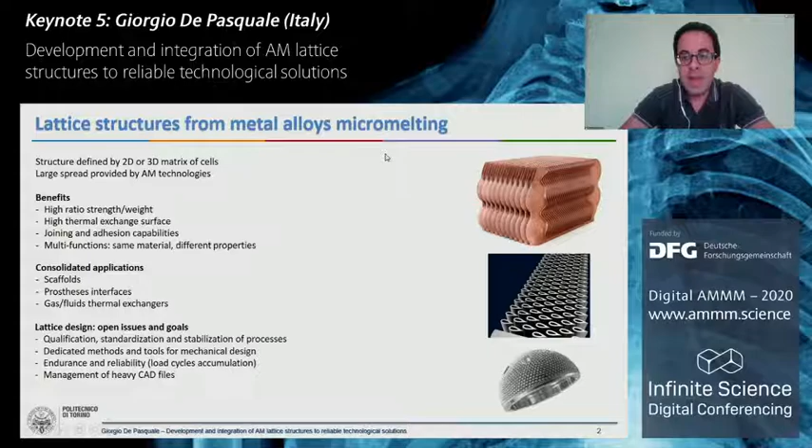Another important issue is related to the lifetime of, let's say, lattice structures applied to mechanical fields, where you have variable loads in time because of the accumulation of load cycles. And last but not least, the problem is the management of CAD files, which is sometimes complicated by the dimension of these files.

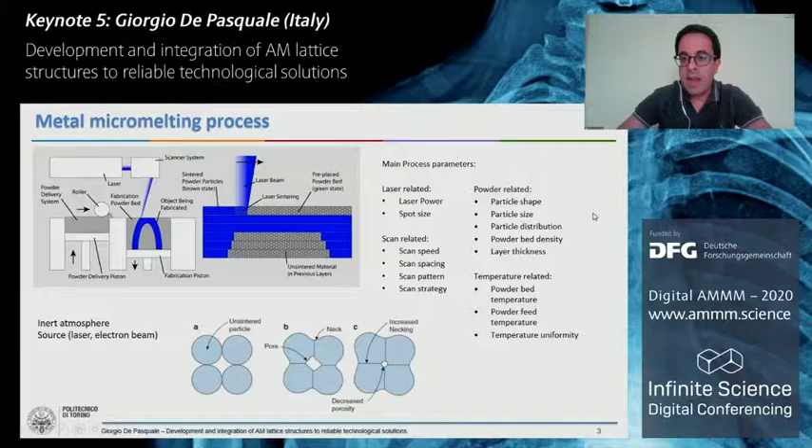So just to have a fast idea of the many process parameters affecting the mechanical design of lattice structures, here I listed the most important of these parameters. Some of them are related to the laser, some of them related to the scanning performances of the laser over the powder bed. Other parameters relate to the powder properties or temperature management. So we have a huge number of influencing parameters that change the mechanical properties of the component. We have to find some way to manage this wide range of variability to find a repeatability of design and fabrication.

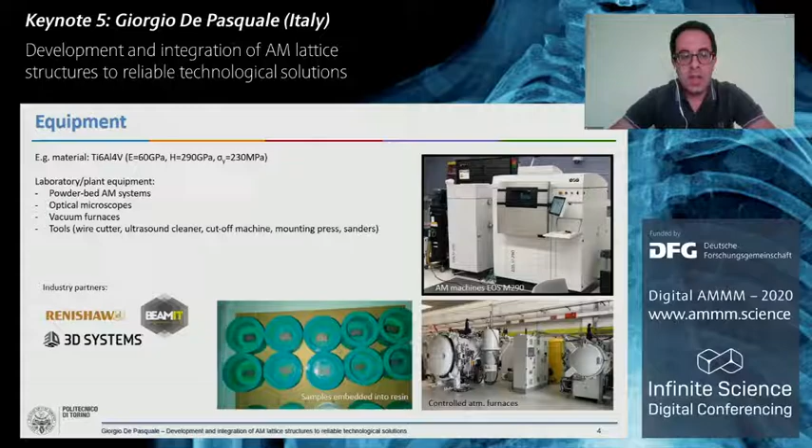We are using several industrial and academic equipment to provide the best reliability and repeatability output of our processes in order to get confidence from our results. So not to have large variability of results depending on the supplier of lattice structure. That is one of the main issues up to now. So we are using SLM processes, EBM processes, laboratory facilities like microscopes, other tools for the mechanical characterization, optical characterization of our samples.

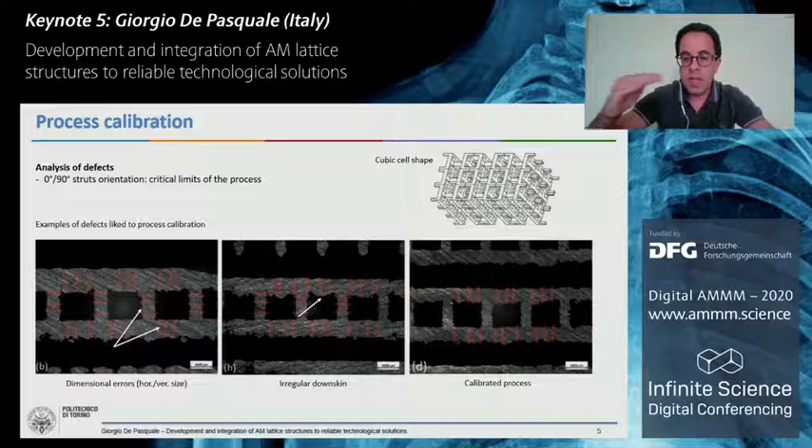So the first point is to stabilize and to calibrate, let's say, the fabrication process. To do this, the best way is to find what is the correlation between one process parameter and one mechanical property, and also the mutual correlation and interaction between the process parameters. For instance, we can understand some problems looking at these pictures where we have dimensional errors between horizontal and vertical struts, or irregular shape of downskin or upskin of our structures.

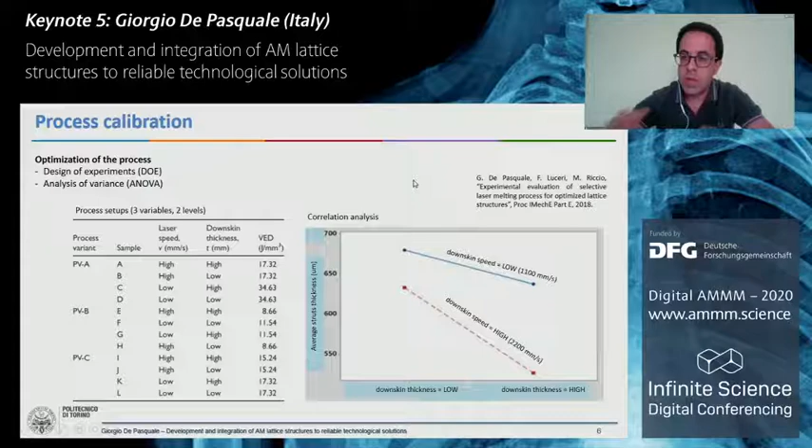The same thing is valid also for the density and the porosity of the material, which is also related to the parameters of the process. We know that high porosity means low mechanical properties. High porosity on the surface associated to the contour settings of our process means low fatigue strength.

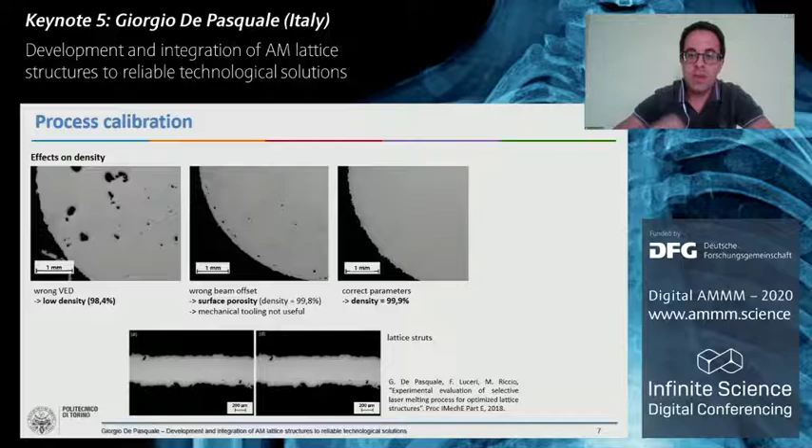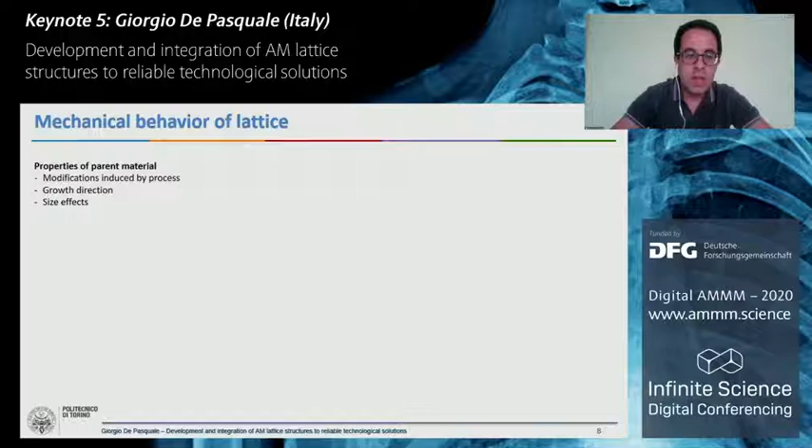And again, from a mechanical point of view of structural design, we need to understand which parameter affects which specific topological property of our structure. Moving towards the mechanical behavior of lattice, we have 3 different levels of analysis. The properties of the parent material, of course, depend on the process, on the growth direction inside the additive manufacturing machine, and also on the size effect, so on the dimension of the sample.

In another scale, the micro scale, we can investigate the properties of lattice, so the properties of the single cell, by using especially theoretical analysis or compact modeling. And in the last scale, the macro scale, we can understand the behavior of the full structure and the interactions between cells. Here, we can also apply experiments to validate the previous models.

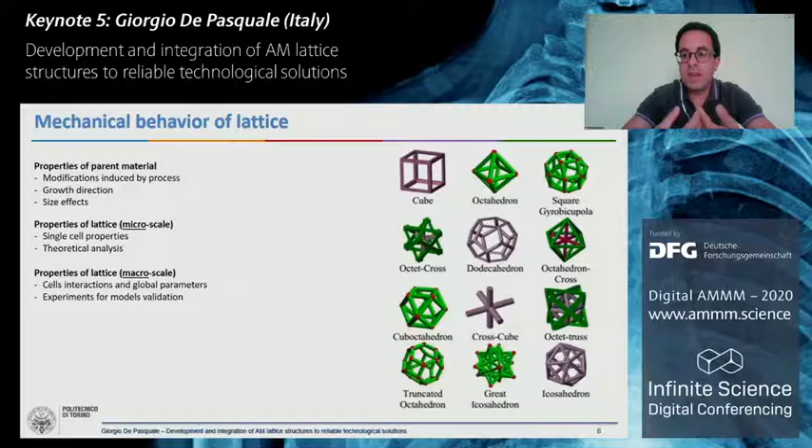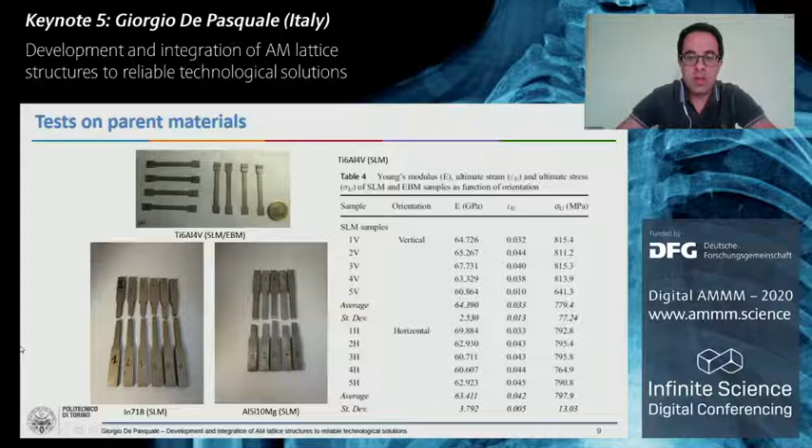So the parent materials can be studied by means of mechanical tests on specific samples, designed depending on the orientation in the fabrication machine, on the process parameters, and of course on the material used. For example, we have output curves like this. Just to have an idea about the importance of the process, the same material can express completely different behavior, ductile or brittle, depending on the process.

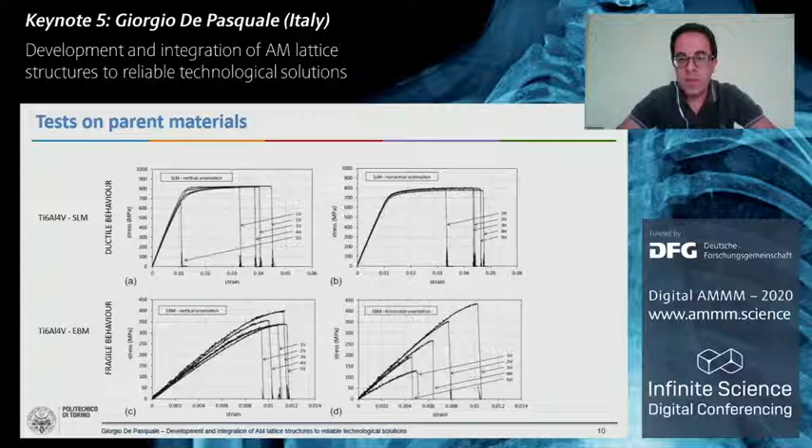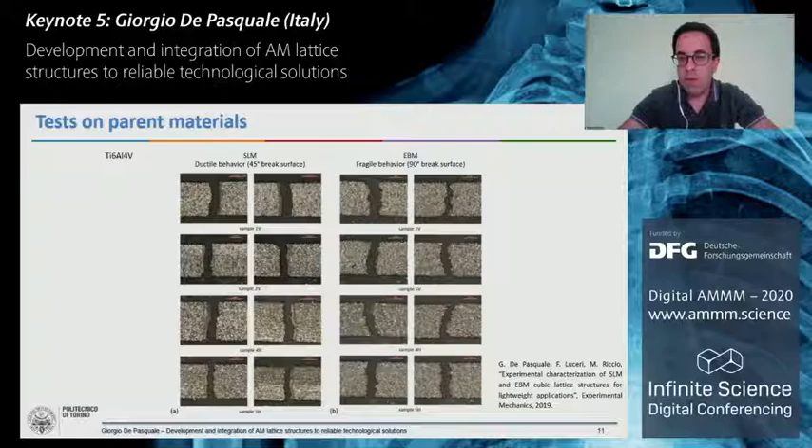In this case, we have titanium alloy run with the SLM process on the top line and with the EBM process on the lower line. We can see very different behavior, just to underline that the process is determinant in this case. The same thing is reported by the breaking surface of samples. We have a 45-degree breaking surface orientation, typical of ductile materials, in the first case on the left, and the 90-degree orientation, typical of fragile materials, on the right.

About the structure, after combining different cells and fabricating a structure, we can investigate these properties by means of parametric samples. That means these samples have different cell size or shape, and we can control the influence of each geometrical parameter on the results and compare these results with the predictions provided by models.

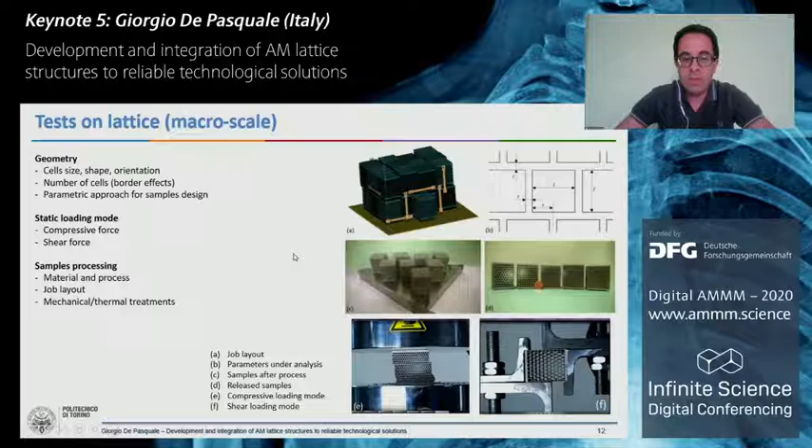On the top left, we have an example of the layout of our machine chamber filled with different kinds of samples with different orientations. Then the printed samples, the released samples, and on the lower line, two frames of compressive and shear tests on lattice structure samples. Of course, here we also have other influences on the results, for instance from post-printing treatments, thermal treatments on the samples.

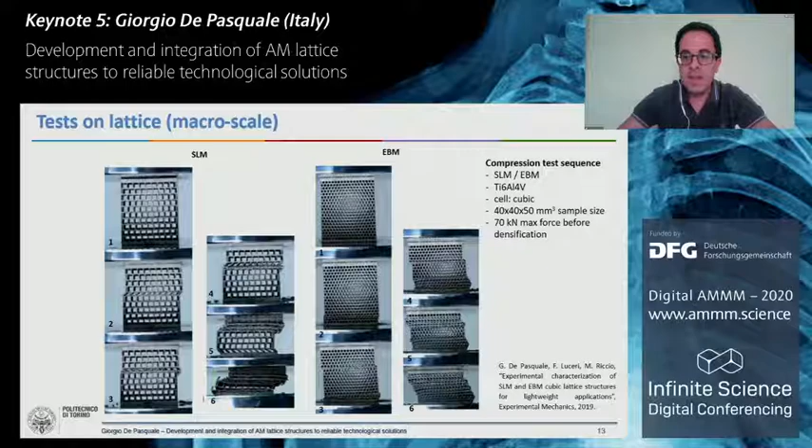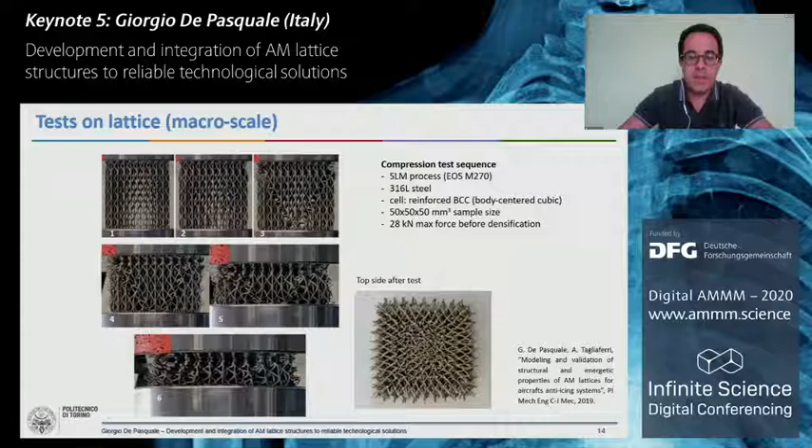Here we have different cell shapes, but also different strut thicknesses. Just to give an idea of our approach, which is to investigate and cover different cases of dimensions and shapes of the lattice to provide validation of predictive calculations.

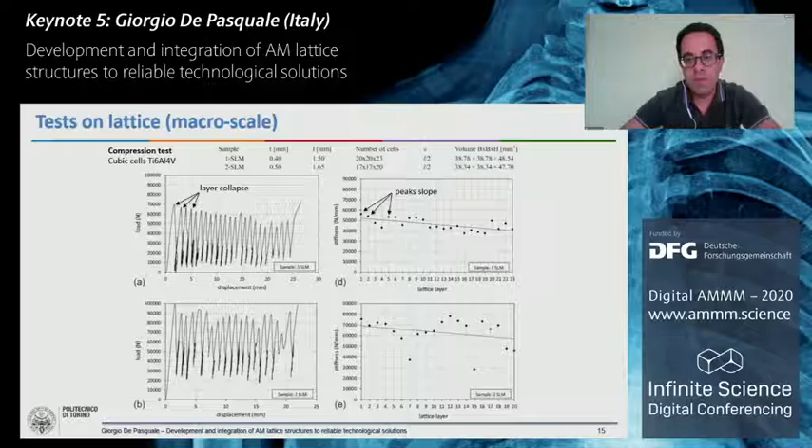In the case of macro scale test results, we have diagrams like this. Each peak corresponds to the collapse of a single layer of our sample, and every peak also reports the stiffness, mainly, of each of the residual layers surviving in the sample. So in a load-displacement diagram, we have a behavior like this. In a diagram where we plot the stiffness of the single layer versus the number of collapsed layers, we also observed a trend like this, testifying a progressive lowering of stiffness during the collapse of each single layer of a lattice structure.

Another important result from our tests is the mode of failure. In this specific sample, we observed three main failure modes. Mode 1 is associated with buckling, so instability of vertical struts. In mode 2, we have bending of horizontal struts, so plastic failure. And mode 3 is a combination of mode 1 and mode 2.

Here we can also see that the fracture line of our sample follows the shape of the cell. So in some way we are also able to modulate the direction and the way of crack of our sample by changing the shape and the distribution of cells in space.

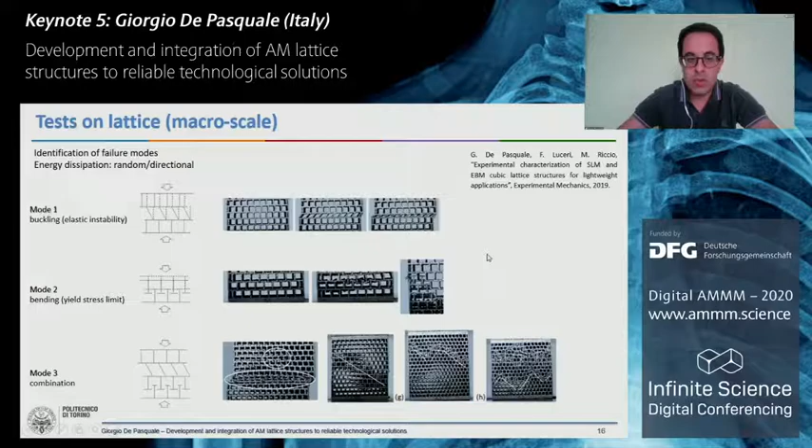Something about the modeling of lattice mechanical behavior. There are different approaches. The analytic model is the best one in theory, because it allows us to clarify the specific relations between the parameters.

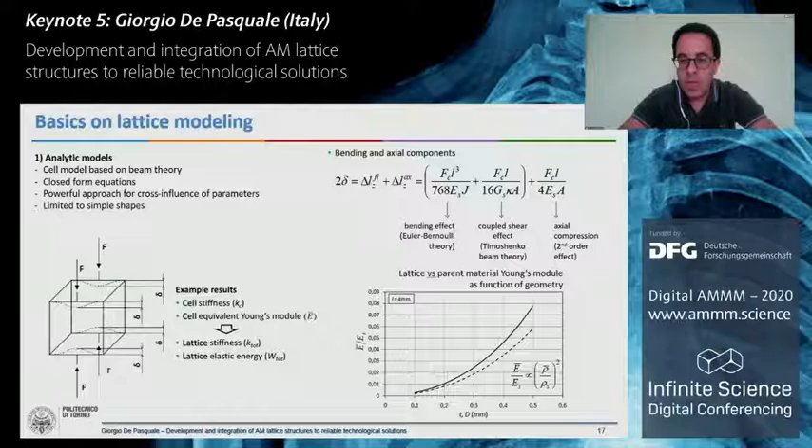Because in analytic models, you can write the full explicit equation that describes the behavior of your cell. And analytic models are based on the beam theory that structural engineers well know. But unfortunately, only simple shapes can be treated with analytic models. In case of complicated shapes of cells, it is quite complicated to describe equations like this, for example, that is valid for the cubic cell, where we have different components from Euler-Bernoulli theory, Timoshenko beam theory, and so on.

So for other more complicated cases, we need to use numerical models. And here again, we have at our hands the traditional finite element modeling tools that can be used, of course, but they complicate the calculation a lot because they introduce a very huge amount of equations in our solver system, because we have a complex geometry, so a high number of elements and nodes. And so this approach is not very feasible for complicated and large components.

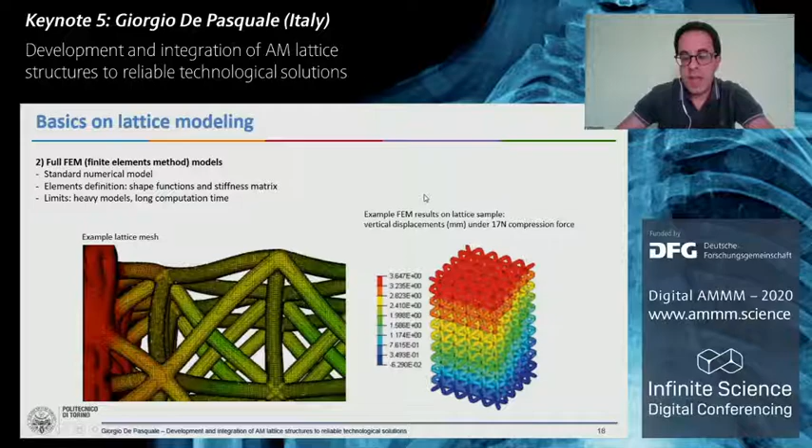The alternative, that is the best way in our opinion, is to use reduced order models, for example the homogenization method, where you can replace the complex shape of your lattice cell with a homogeneous solid with very simple geometry that has the same mechanical and structural properties of the real lattice shape. There are well-known methods to do this transformation under specific hypotheses.

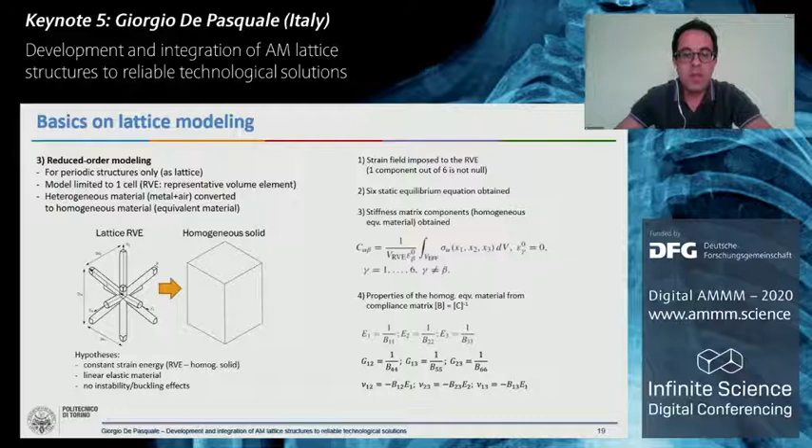And basically, we can impose a strain field on the representative volume element, that is our cell, to write 6 equilibrium equations and to calculate each component of the stiffness matrix of our element. Then, by calculating the compliance matrix, that is the inverse of the stiffness matrix, we can simply calculate the Young modulus, shear modulus, and Poisson's ratio of our element. And we use this very easy and simple brick shape to make our models in a much faster way with very low computational heaviness.

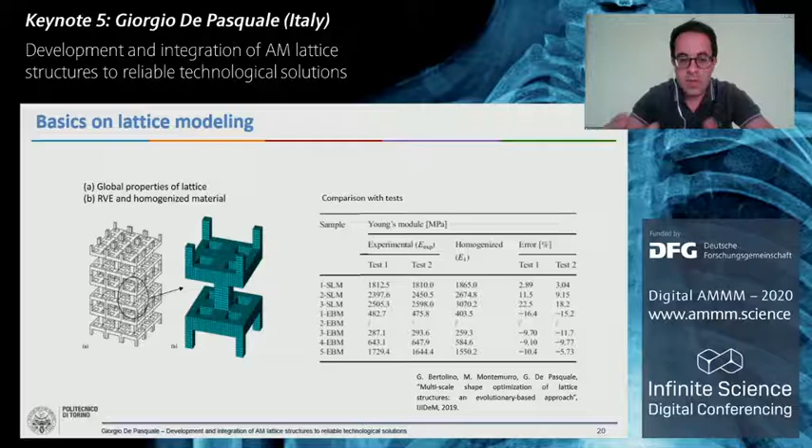For example, in the case we saw before, for the cubic cells, we can study only one representative volume element and study its behavior and then extend the properties all over the volume. In the results in this table on the far right, we can see that the errors are pretty low. And these errors also include the border effects of the samples, which are quite small, so these effects are quite important.

Something about the importance of lattice structures in application for biomedicine, thanks to the functionally graded geometries. This way of design includes the variation of the cell geometrical parameters inside the volume of the component. For instance, we can increase the equivalent density of the cell by changing the position. This allows us to create transition regions between bulk volumes and lattice volumes, and also to create hybrid structures.

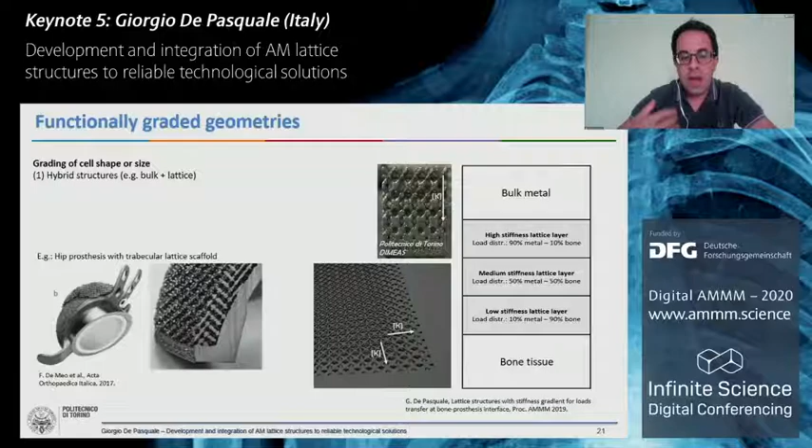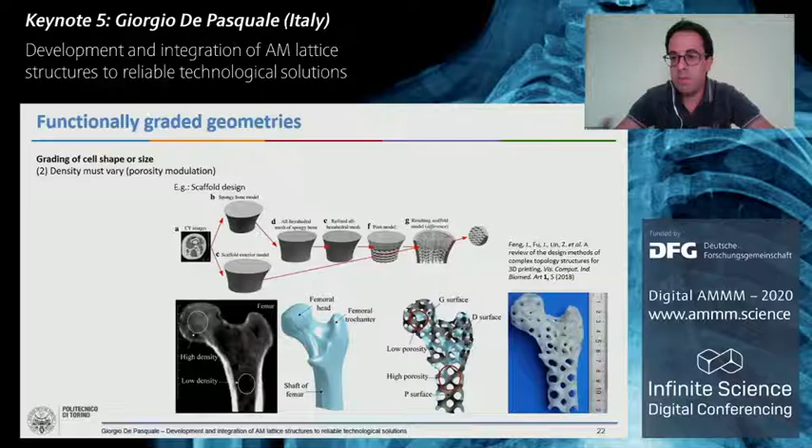For example, in the coatings of prostheses, it is quite useful to improve the adhesion with bone tissues and to have a gradual variation of stiffness that allows the bone to train itself, improving the anchoring. The same thing is also used in literature for reproducing biological tissues where the density is variable. For example, in a femur, with a CT image you can understand where the density is high and low, and reproduce the same by using different densities of the lattice structure.

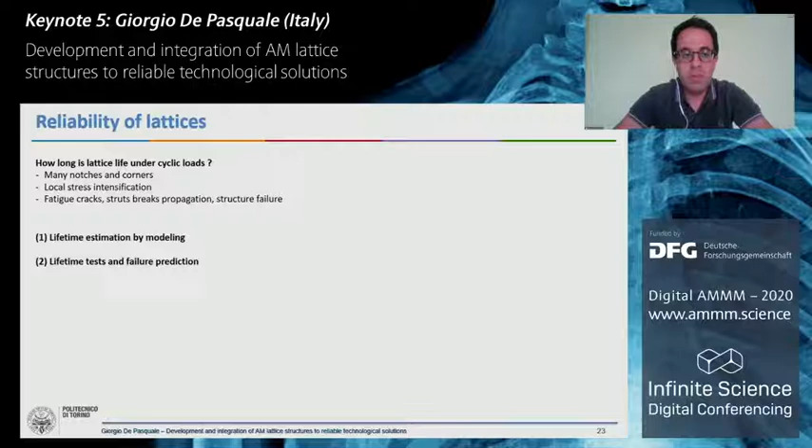What about reliability of lattice? This is a quite important topic for mechanical design, because a structure strong in static may be very, very unreliable under cyclic loads. So we need to understand what happens if you apply cyclic loads to the lattice structure. We have a lot of notches, a lot of corners that are potential points of initiation of fatigue cracks that may induce breaking in a very short time. We have 2 approaches to investigate this. We can estimate the lifetime of our component by modeling or by tests and failure predictions. Let's start with modeling.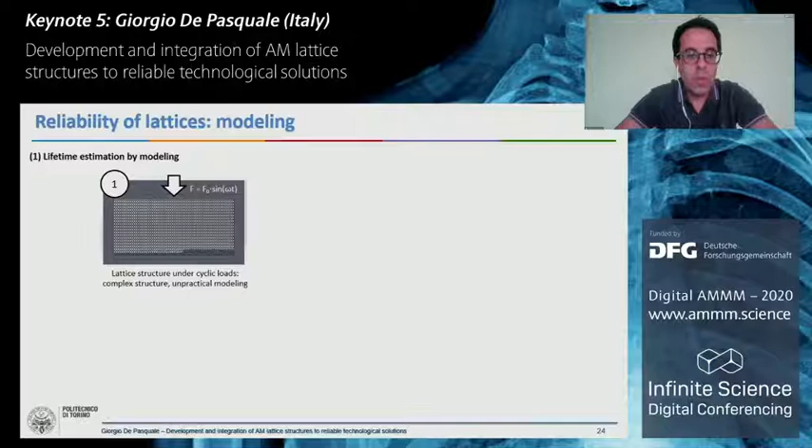If we consider a lattice structure where a cyclic load is applied, the shape is complicated, so it's not easy to use FEM models. So the best way is to apply the homogenization method to convert our lattice cell into a homogeneous solid material, so a brick element, then to rebuild our volume and calculate the stress distribution inside it. Then we can identify only the most loaded cell. We don't need to study all the cells; only the most loaded one is enough. We apply the inverse homogenization criteria on this most loaded cell to rebuild the original shape of the real lattice cell, and we can investigate the stress distribution on the most loaded cell of our lattice structure.

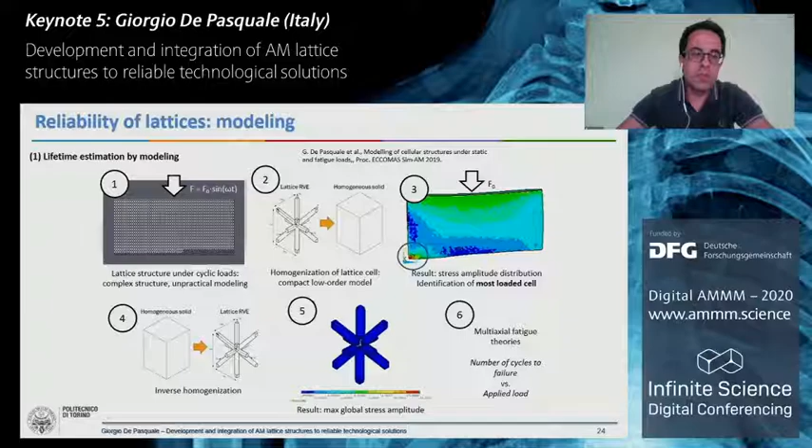Then we can simply apply multi-axial fatigue theories that are well known and largely applied in mechanics to understand the number of cycles to failure depending on the load applied. That means depending on the average load and depending on the amplitude of the variable load applied. So this is a reliable, fast, and suitable way to understand lifetime, to predict lifetime in lattice structures.

From the experimental side, we have different approaches. Here I show only one, where you can see some samples in uniform shape or graded shape. In this case, we applied a cyclic load at 30 Hertz on these samples, and we simply measure the number of cycles to failure of our samples, and we try to reproduce the same behavior that we can see for traditional study of mechanical fatigue in mechanical components.

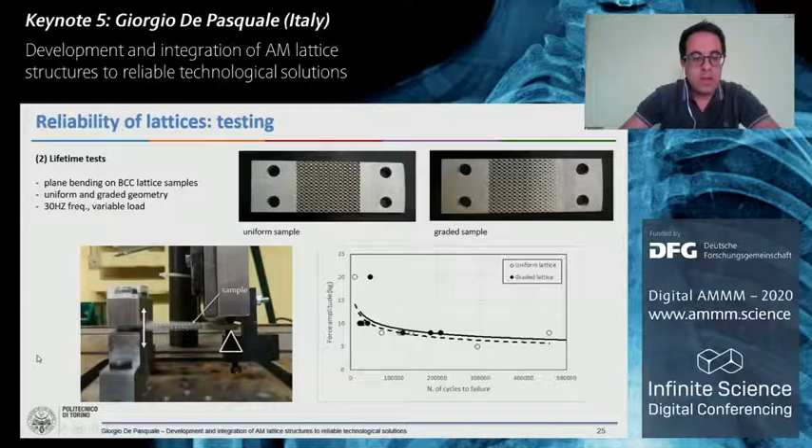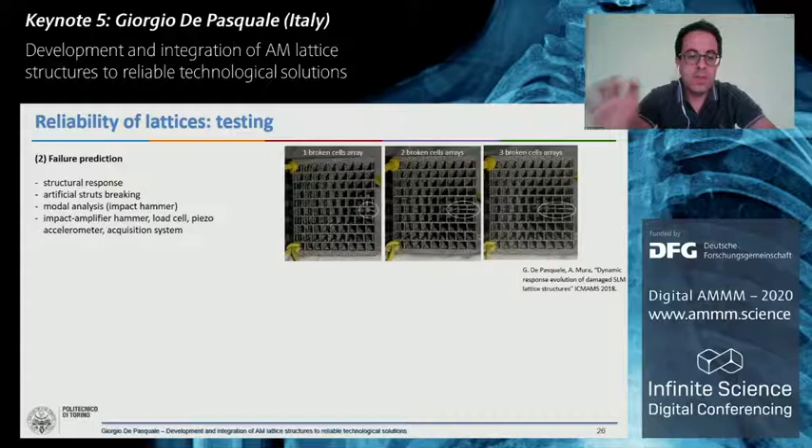The first results we have are promising because the shape of our output curves is very similar to the Wöhler diagram, and so in some ways we can use the same tools we already know. Another approach, for example, is to induce some failures on our lattice structures and to modify the global stiffness of the structure. In this case, we can use the structural dynamic response to predict the moment of catastrophic failure.

And in fact, if we see the dynamic response of this sample, where we have artificially damaged some rows of cells, of course, we can see that the response varies. The resonance peak is moving. So we can also define a warning threshold and an ultimate breaking threshold that can be considered to replace the structure, or even to stop operations, and even to prevent the failure.

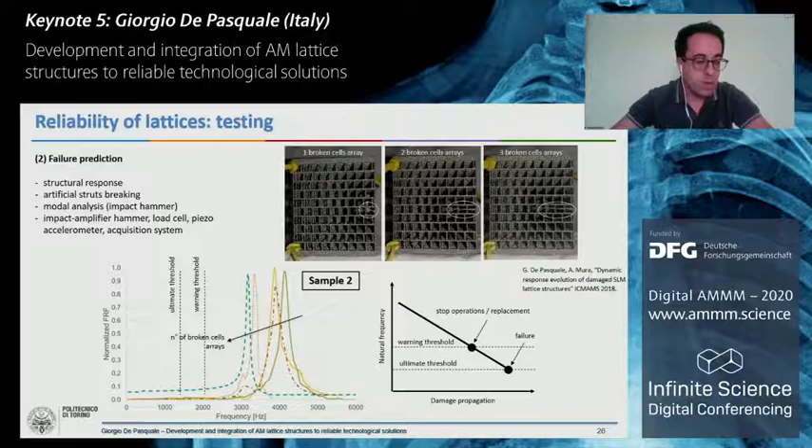I want to conclude with two quite new applications of lattice structures. The first one is composites based on filling lattice structures with polymers. This technology is pretty new. We tried to make these samples with good results by creating a temporary mold made in silicone, and by filling our lattice structure, in this case a metal lattice structure made with aluminum, with liquid polymeric resin, followed by curing. So what we get is a polymer with a sort of reinforcement inside, provided by the lattice structure.

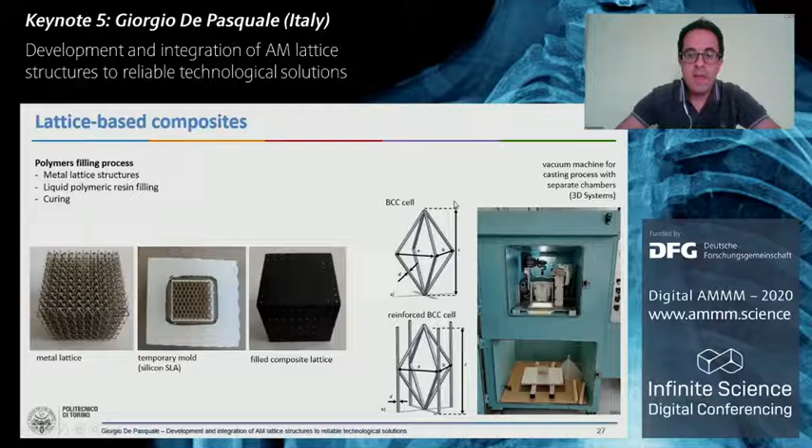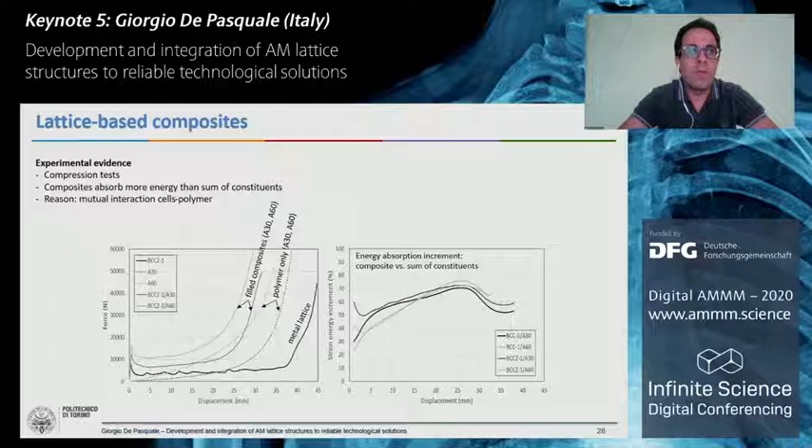So the result is that the elastoplastic energy absorbed by the composite is higher than the sum of the two energies absorbed by each of the two components. And this increase of energy absorption, as we can see on the right, can reach also 70%. So it's a pretty high increment of energy absorption that makes this composite very suitable for impact absorption applications.

The very last thing is the functionalization of lattice structures. In this case, we are using a coating of our metal parts that is based on a lattice coating, to create a smart joint with carbon fiber polymers, so with composite polymers based on carbon fibers. We provide a mechanical connection between the carbon fibers and the lattice cells in order to improve the adhesion of the two materials to create a functional joint without adhesives or rivets or mechanical connections.

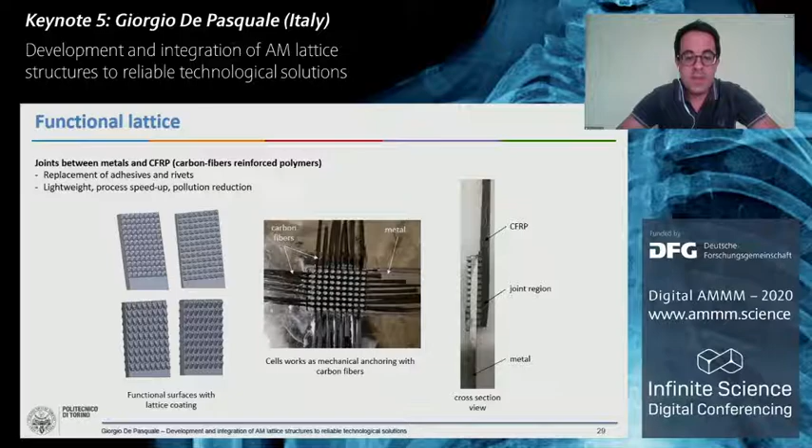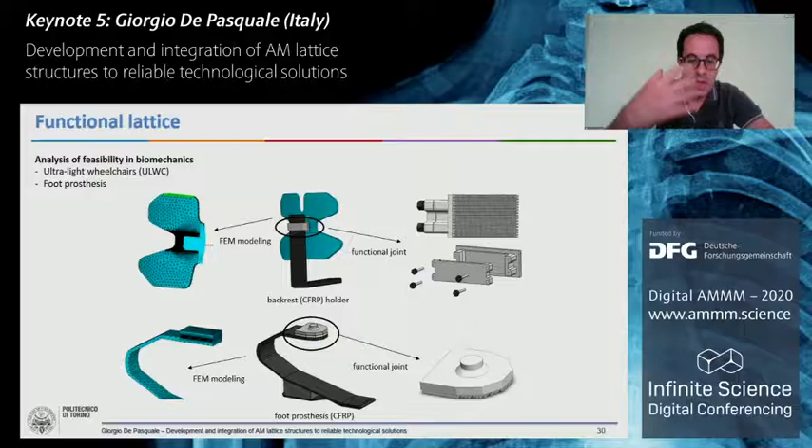And this is very useful for lightweight applications. It's useful because it speeds up the process of joining metals and composite materials and reduces the pollution related to the adhesives and chemical agents used for the adhesion. Two applications have been already studied. One is for ultralight wheelchairs, where we designed a component on the backrest to fix the backrest with this functional joint. And another application is associated with foot prostheses, where again we calculate and dimension this functional joint with the upper connection of the prosthesis in carbon fiber material.

So just to conclude, I tried to give you an overview of our activities based on additive manufacturing lattice structures from a mechanical point of view. Of course, the conclusion is that a strong design method involves modeling and simulation on one side and experimental validation on the other side. Our results are based on investigation of parent material properties, on the prediction of single-cell properties, and on the global lattice response of the structure.

A very important focus is put on the reliability and lifetime of lattices, because it is important to provide some way to predict the failure and to anticipate the failure, especially when these structures are applied on the body or inside the body. And of course, some new ideas have been shown that are based on polymer filling for impact absorption and smart joints between metals and carbon fiber reinforced polymers. Thank you very much for your attention.